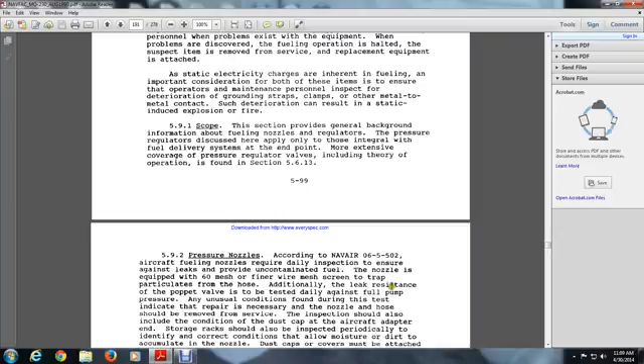Storage racks should be inspected periodically to identify and correct any condition allowing moisture and dirt to accumulate in the nozzle. Dust caps and covers must be attached to all stowed nozzles.

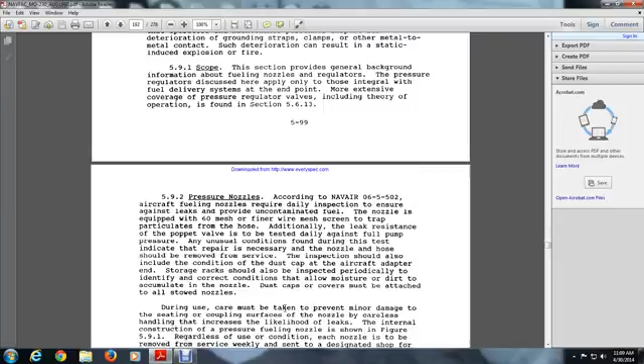During use, care must be taken to prevent minor damage to the seating and coupling surfaces of the nozzle. Careless handling increases the likelihood of leaks.

Internal construction of the pressure fueling nozzle is shown in Figure 5.9.1. Regardless of condition, each nozzle is to be removed from service weekly and sent to the designated shop for inspection.

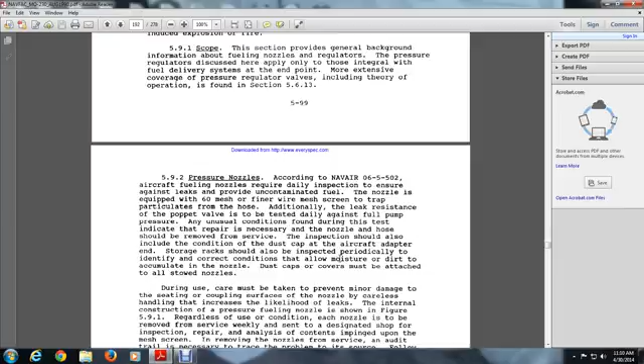Repair, analysis, and connection tests are performed as necessary to trace problems to their source, following local procedures for tagging and reporting. Other actions performed at the repair shop include testing nozzle interlocks to prevent discharge of fuel when not properly connected.

Other actions include setting or adjustment of the poppet valve, cleaning the mesh screens, using acetone to remove fuel gum, and blowing down with compressed air.

The operation of the valve crank assembly is checked for smooth, positive motion on the special test bed. The manufacturer's technical manual should be consulted for specific test requirements.

5.9.3 Pressure Regulators. The hose end regulator is a spring operated valve used to prevent pressure surges from reaching the aircraft fuel system. The valve spring operates against the fuel pressure.

When the spring is overcome by excessive fuel pressure, the valve restricts flow until pressure returns to the set point. The operating pressure of the regulator is determined by the spring selection. The regulator is not adjusted unless a different spring is inserted in the body.

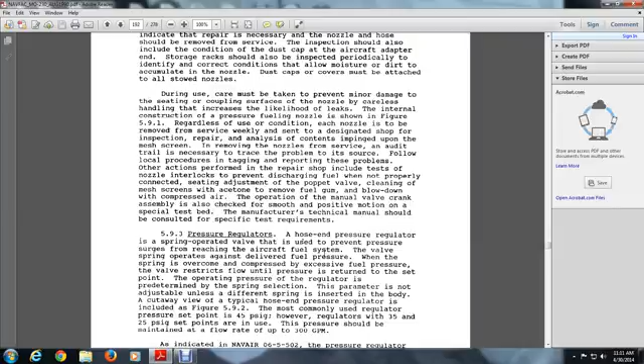The cutaway shows the typical hose pressure regulator, included as Figure 5.9.2. The most commonly used regulator is set at a point of 45 PSIG. However, regulators with a 35 or 25 PSIG set point are also in use. The pressure should be maintained at a flow rate of up to 300 GPM.

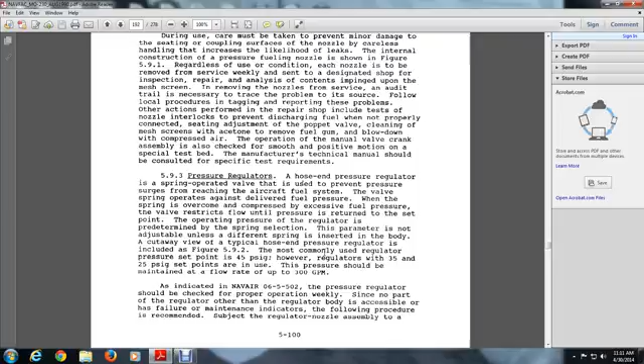As indicated by NAVAIR 06-5-502, the pressure regulator should be checked for proper operation weekly. Since no part of the regulator other than the regulator body is accessible for repair, the following maintenance procedures are recommended. The subject regulator nozzle assembly shown here has a valve, seal, and crank.

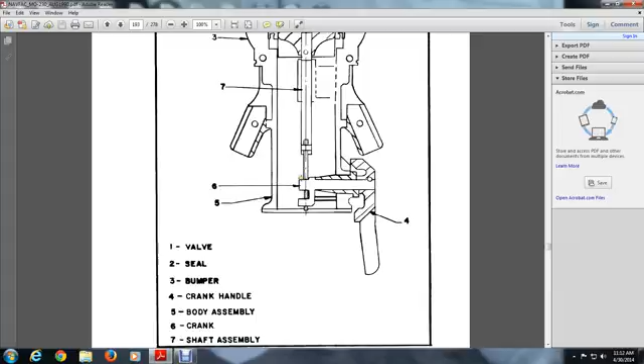Here you'll see number 1, the valve; 2, the seal; 3, the bumper; 5, the body assembly; 6, the crank; 7, the shaft assembly; and 4, the crank handle. This is the pressure fueling nozzle crank cross section.

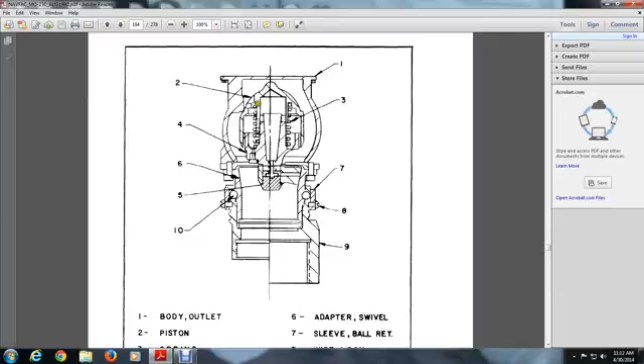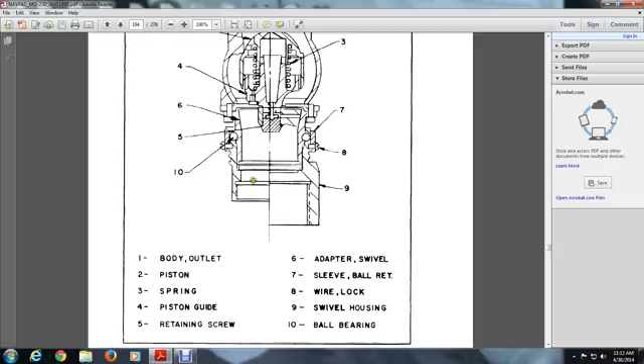Here is a pressure regulating valve quick disconnect coupler cutaway view. 1 is the body. 2 is the piston. 3 is the spring. 4 is the piston guide. 5 is the retaining screw. 7 is the sleeve ball and retainer. 8 is the wire lock. 9 is the swivel housing. 10 is the ball bearing.

The daily circulation check involves attaching the nozzle to an adapter that allows recirculation of the fuel, assisting the pump. At the end of the recirculation period, an approved pressure gauge is attached and the sample is checked. The connection of the nozzle is compared to the gauge reading as specified in the manufacturer's technical manual for the spring in use. If the reading falls outside tolerance, remove the regulator from service and send it to the repair shop.

The repair shop recirculation test loop is used to check the ability of the regulator to sustain and measure the varying flow rates. A diagram of the typical test loop is provided in Figure 5.9.3.

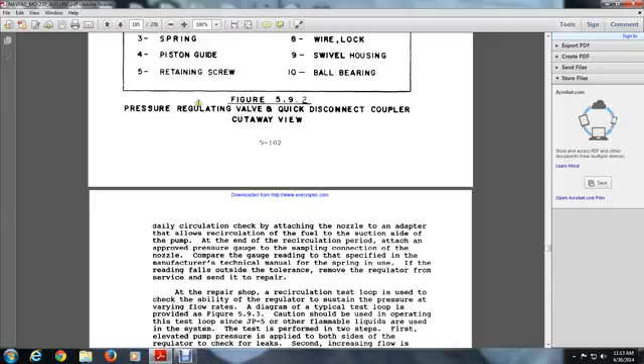Caution should be used in operation. The test loop, if JP5 or other flammable liquids are used in the system, the test is performed in two steps: first, elevated pressure is applied to both sides of the regulator to check for leaks; second, increasing the flow establishes the pressure, and the downstream pressure at or below the set point is recorded as a function of flow rate. Refer to the manufacturer's technical manual for more details.